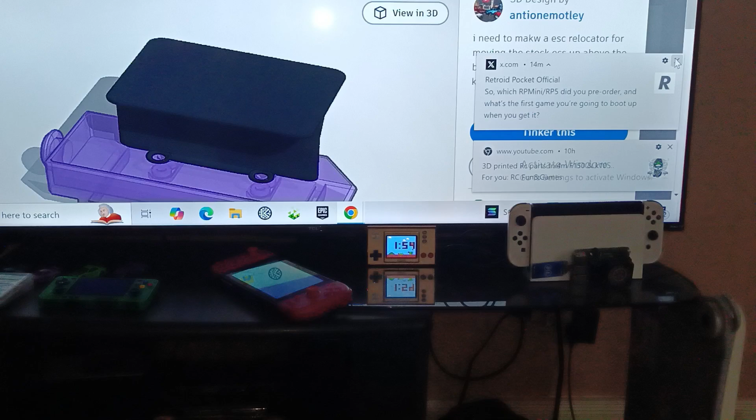But now, I got some content to talk about.

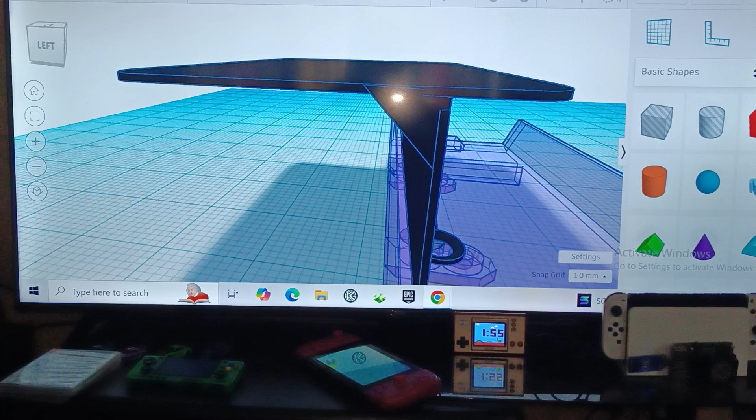So this is gonna fit, hopefully, once I print it and I test it out. I wanted to make it a little bit stronger, so I put some brackets here. Let me turn that light off - oh, that was flash, there we go. So I put like triangle brackets here to kind of strengthen it, hopefully.

And then, you know, just use some double-sided tape here and stick your ESC here. I might get all fancy and cross mount and measure once I find my micrometers so I can get the bolt holes right, and then put bolt holes here so that we can bolt it down. That'd be kind of cool.

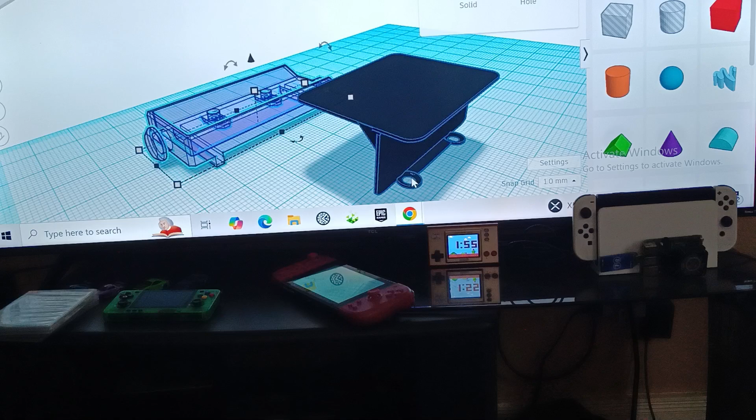But thanks for, I can't remember who designed this part, but thank you to whoever designed that. I countersunk the holes on the rings here, so hopefully the screw will just fit in, and then you can just slide your battery right over that. Maybe some tape over that, you know what I'm saying, so there's not potential battery damage.

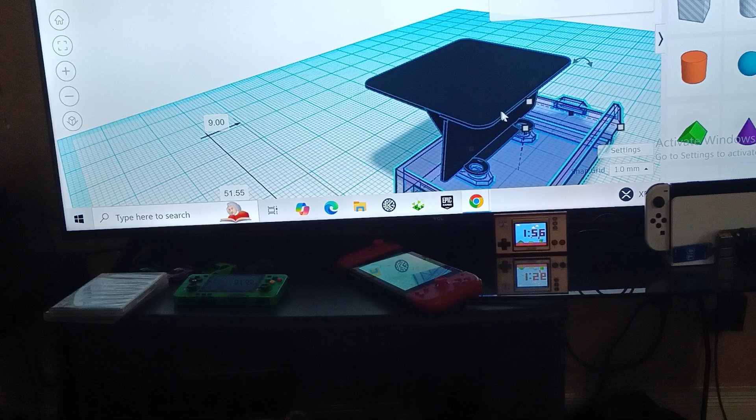And I was thinking about making another housing that might come over, so it sits here and comes over and down, maybe, you know what I'm saying, just like there'd be a little chute for the battery, but then the battery tray, you know, the strap, and all that - I think the strap can still go through with it sitting up against the wall. So I believe the strap could just go through.

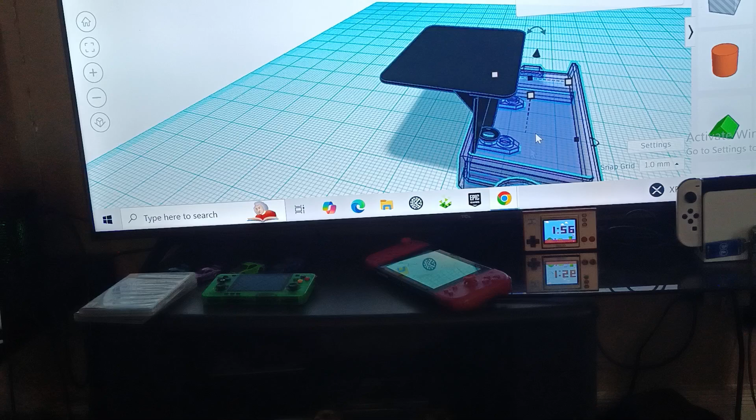And I don't think this battery tray goes to the regular stock Trx4m. I think it goes to a low center of gravity chassis, is what I saw on Thingiverse. So that's just what I've been doing, you guys, for the past days.

Oh, and I've been designing the bridge mounts again, trying just so I can design a bridge. I really want to make a bridge, so I got to go a little bit wider for the Trx4Ms, but for the Orlando Hunters and SCX24s, that'll be perfect. So I might just go and start printing these, because the trucks can still drive on these, and it'll give them a little bit more challenge, you know what I'm saying, to drive on it like that.